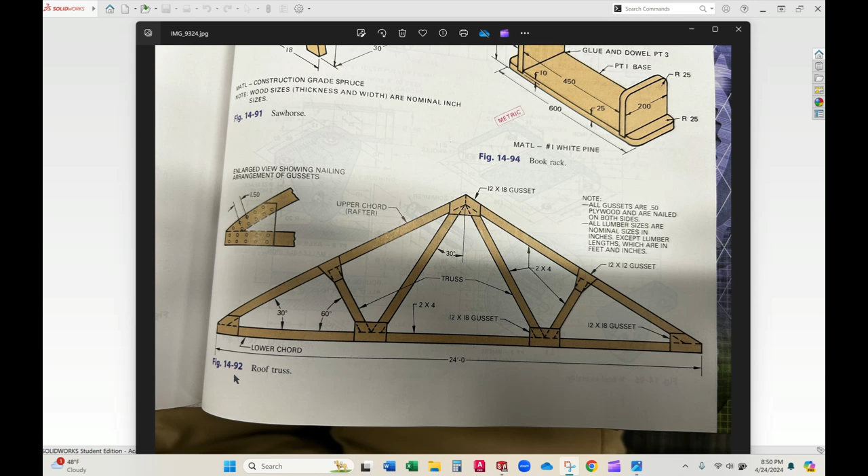We're going to be making this roof truss. If you need to take a screenshot of it to have the measurements, go ahead and do that now. If you got the book, it's figure 14-92. All right, let's slide it off the screen.

So we got our SOLIDWORKS. We're going to open up a new part. And once it opens up, kind of slap a sketch onto the old front plane and get us going here. To make this, I'm going to be using a lot of these 3-point corner rectangles. I'm going to start off just down here at my origin point. I'm going to draw the left-hand side of this truss and then just mirror it.

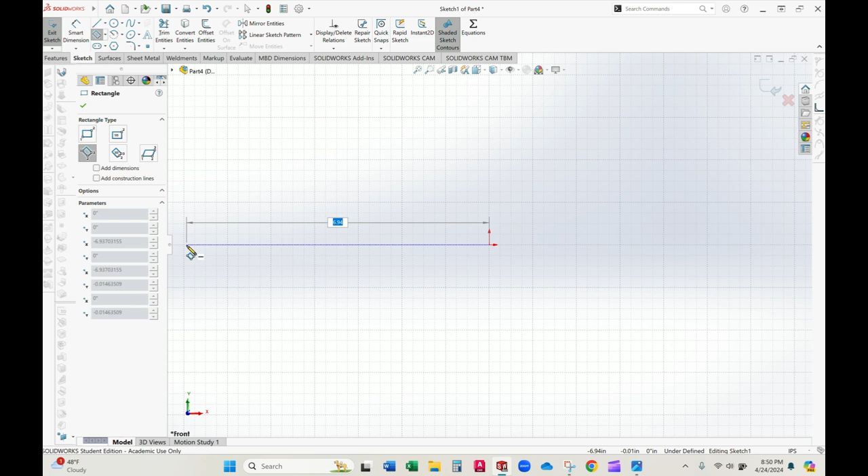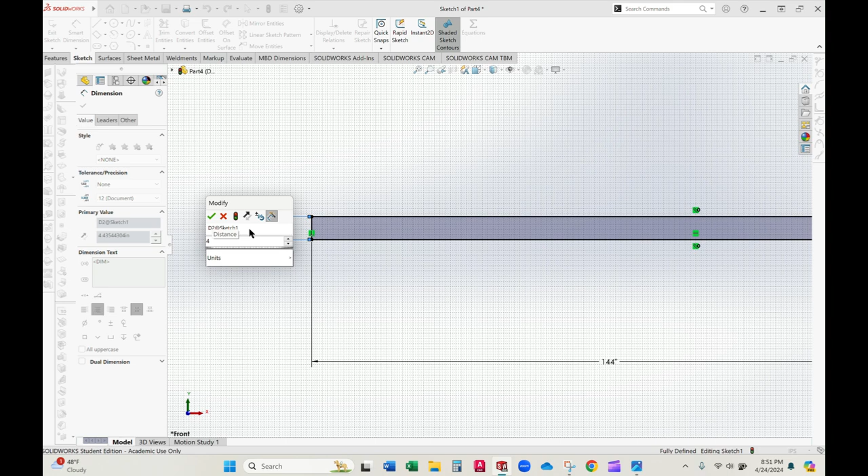Okay, so a nice horizontal line, and I'll assign a value to it. Now the whole thing was 24 feet long, so this left side is going to be 12 feet, aka 144 inches. And I'll assign my actual height of my 2x4 at 4 inches. We're just going to assume that all of our 2x4s are actually 2 inches by 4 inches for today's drawing. Okay, so now I have a fully defined sketch of this single 2x4.

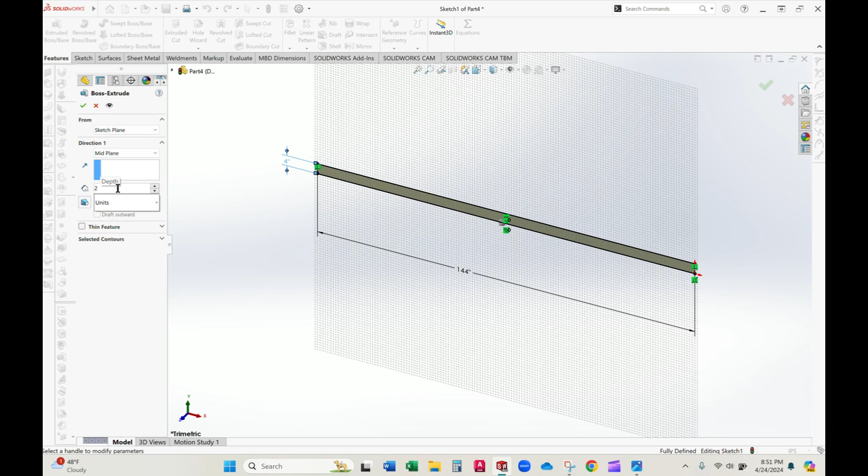And just like that, I'm going to extrude it. Now my extrusions for this truss, I'm going to do on mid-plane. This will become kind of important later when it comes time to mirror things, so we don't have to do everything twice. And we are going to extrude them at a thickness of 2 inches. So mid-plane, 2 inches. Excellent. Got my first 2x4 laid down. Time to slap another one on it.

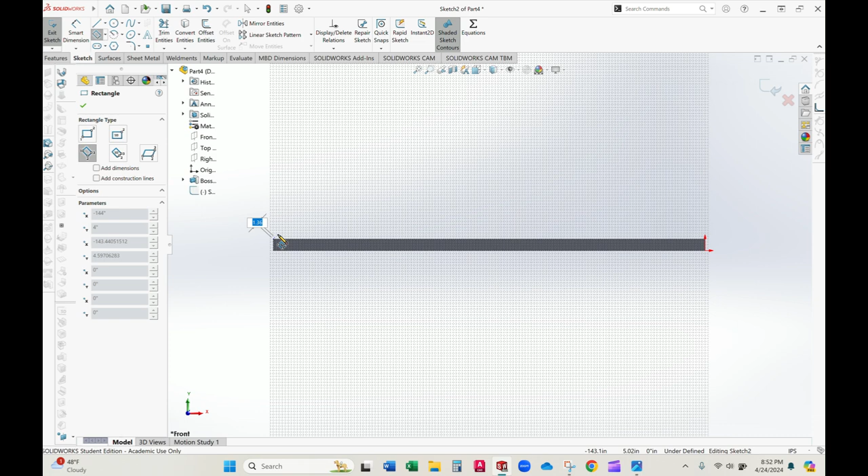Going to put a sketch on the front plane. And I'm going to do my main diagonal beam over here. Once again, 3-point rectangle. And it touches this point. I'm going to make it longer than it needs to be deliberately, because I can easily trim away excess later. There we go. With my smart dimension, I'm going to assign the fact that it is 4 inches. And now I'm going to assign my angle. Sorry, almost got ahead of myself there. I'm going to assign this angle in here, which is given to us in the drawing as being 30 degrees.

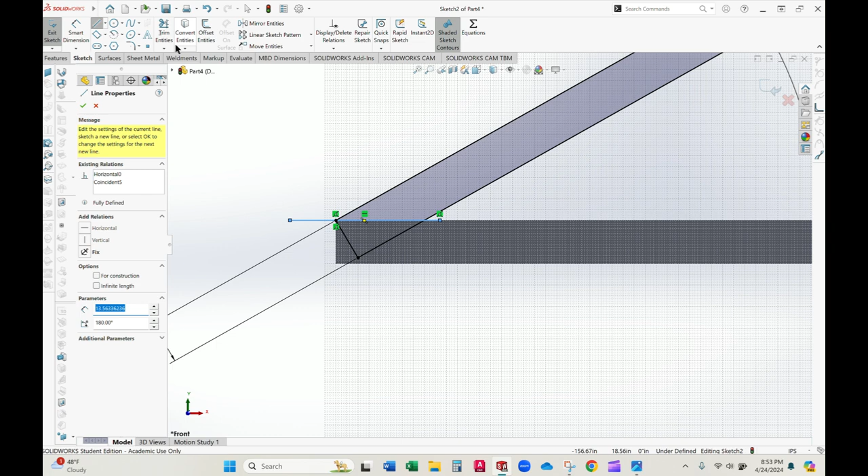Now I'm going to use a line. I'm going to zoom in here, and I'm going to draw where I would have cut with my Skilsaw. So using my line tool, click, drag, make sure it's a nice horizontal line, and release. There we go. Now I'm going to use my trim entities to get rid of the extra that I don't need from the line and from that original rectangle.

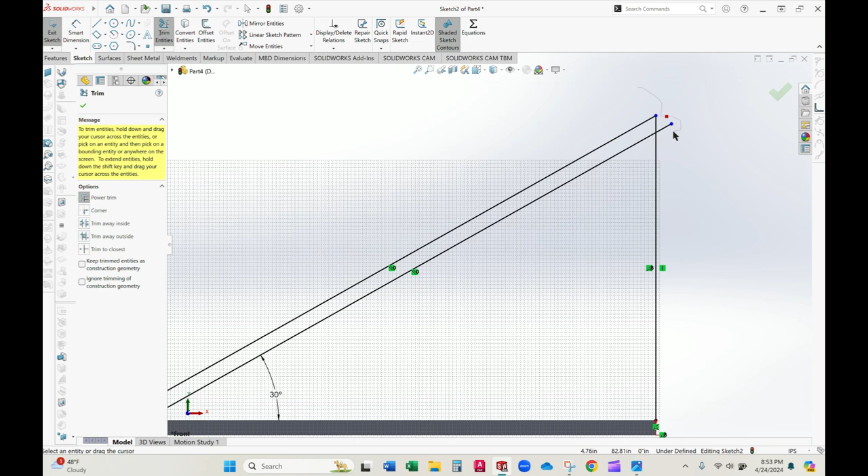All right, I'm going to zoom out, come up here, and I'm going to do the exact same thing. I'm just going to make a much longer line, that way I can reference all the way down. Click, drag, make sure it's a vertical line, and release. Grab my trim entities, get rid of the extra. There we go. And I've got myself a fully defined sketch for my second 2x4 in this build. Go into my features, going to extrude, and I want it to be mid-plane, 2 inches. Perfect.

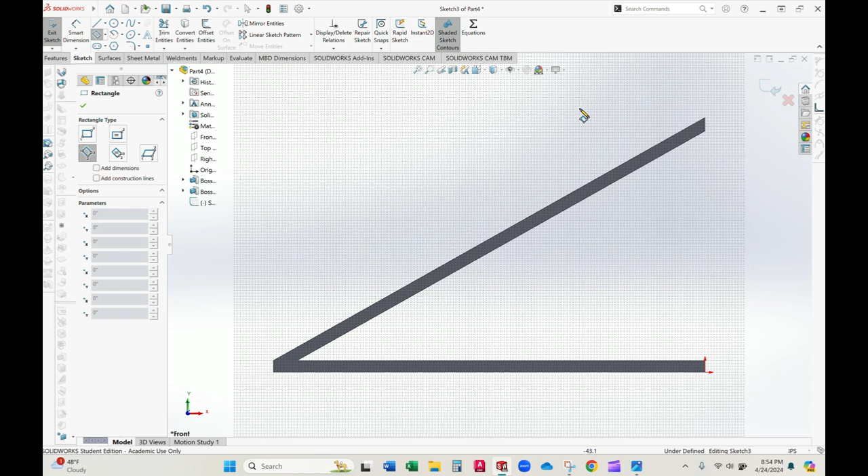And we're just going to keep on going. I'm going to add another sketch. I'm going to put it on the front plane, and this time it's going to be the inner 2x4 that runs right in here. So 3-point rectangle, it comes up to this point, runs towards the center, and I'm going to make it deliberately longer than I need it. And then I'll come in and I'll assign some values. So I'm going to give it its width of 4 inches.

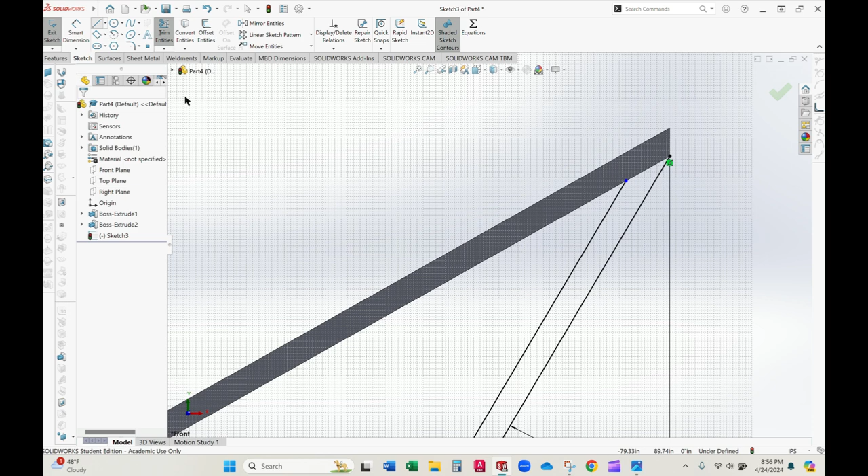And then I'm going to assign the angle using my smart dimension tool. There we go. And I need that to be 30 degrees. Excellent. Now I'm going to use my line to draw my cut and use my trim tool to get rid of all the extra. Ooh. If you ever trim too much with the trim tool, you see how I went back over that little red dot, and it brings it back for me. All right, so let's try that again. And my trim tool. Because it's easy to get a little too excited with the old power trim occasionally.

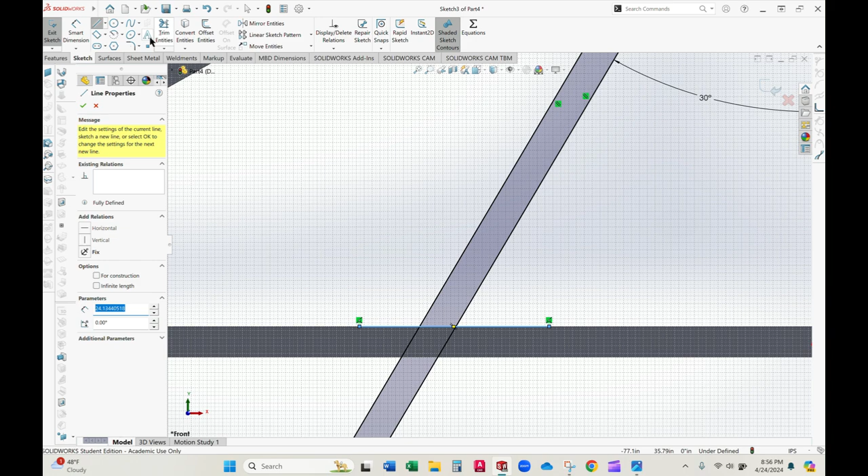And I grab my line tool. Same thing down here. Drawing my line, grabbing my trim tool, trying not to trim too much away this time. And don't forget the little end of the 2x4 that's hanging out. Okay, it's currently saying that the sketch is underdefined. So I'll go into my selection tool. I'll select this actual cut line. And I'll select the line that I was using to reference. So Control, select them both. And I'll say that they're collinear.

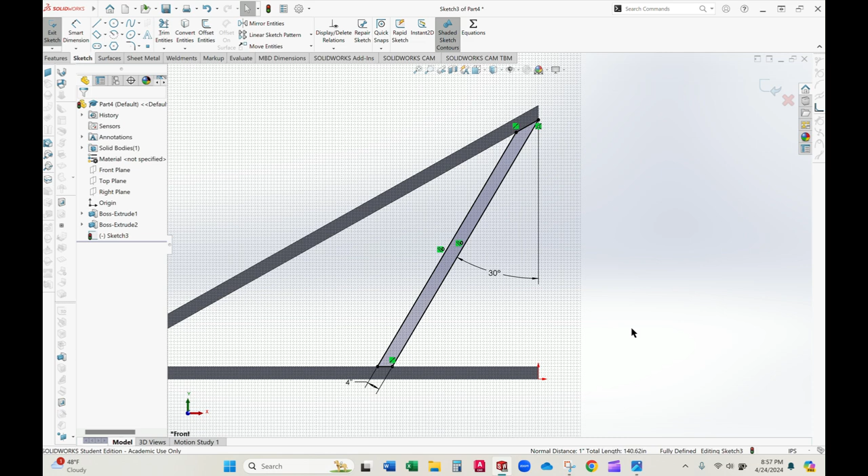And I'll save that. And I'll do the same thing down here. Grab my little cut line, hold Control, grab the line that I referenced off of, say they're collinear. And there we go. Now we have a fully defined sketch. Good. So I can go into my features and I can extrude it. Once again, extruding mid-plane 2 inches. Perfect. And here we go, another sketch on the front plane.

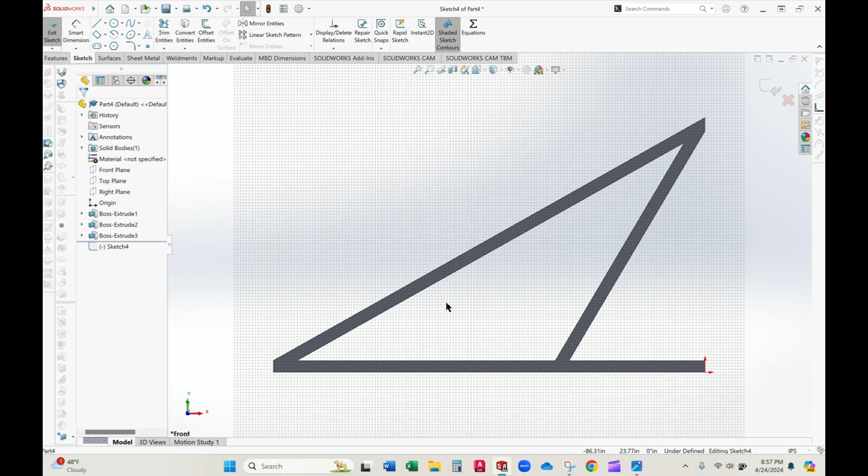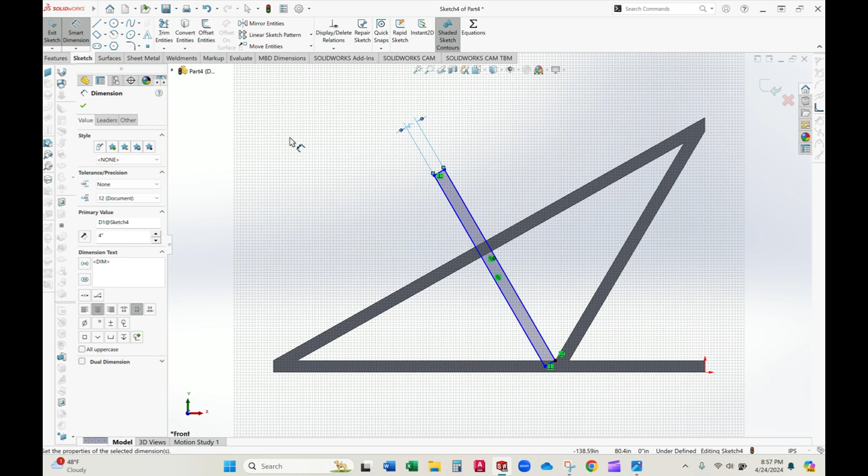And this is going to be the one that runs from here back up to this main diagonal beam. Again, 3-point rectangle. Make it longer than you need it to be. Great. I'm grabbing the Smart Dimension tool, slapping a width on here of 4 inches. Perfect. Now I'm going to assign my angle that is given to us in the drawing as being 60 degrees. Grab my line tool, draw my cut, and use my trim tool to get rid of the extra that I don't need.

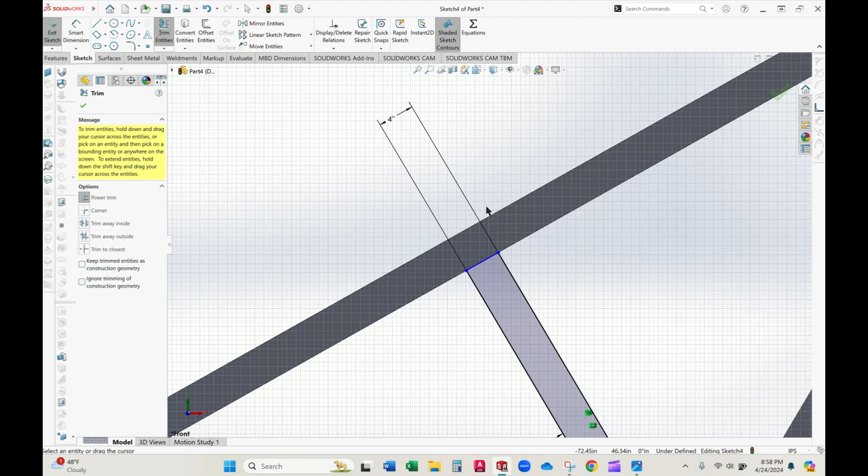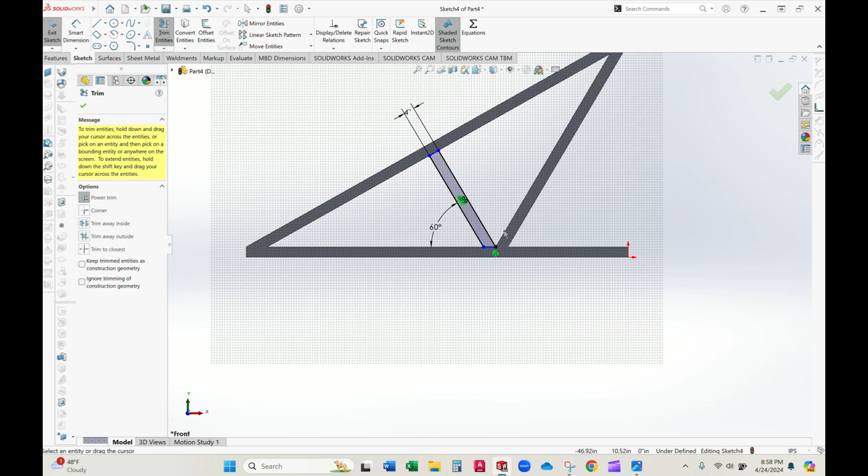Come down to the bottom of this one and do the same thing. Draw my cut. And you see I deliberately make them way longer than they need to be just because then it makes it easier to trim them. Make them tiny and then you're shooting for a small target when you're trimming. Okay, saying that I'm underdefined, so I will say that these are collinear once more. So I'll get into my selection tool, select the line that I referenced, select the little cut line that I drew while holding Control, say collinear.

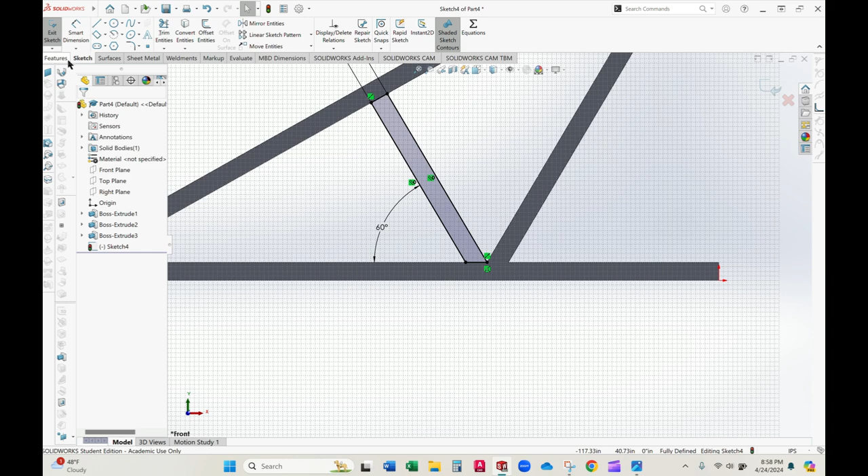And come down here, do the same thing. My little line, hold Control, the big line that I referenced, collinear. And now we're fully defined. Go into my features, boss extrude, mid-plane 2 inches. Excellent. All right, so here is the basic 2x4 structure for this truss. And in the next video, we will slap in some gussets.